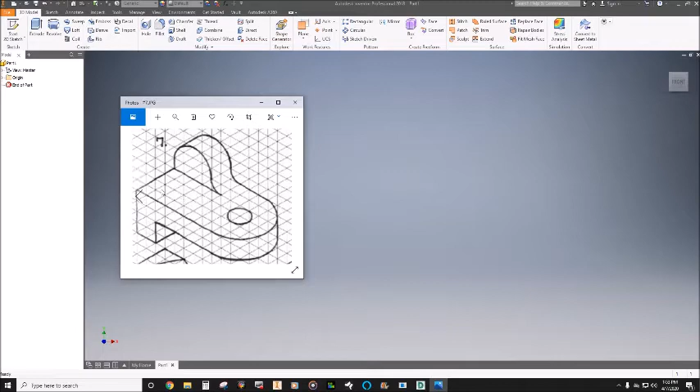All right, let's take a look at shape number 7 here. Remember that each one of these spaces is half an inch. So I'm going to draw some little marks here. 1, 2 inches, 3 inches, 4 inches, 5, so 5.5 inches is the width.

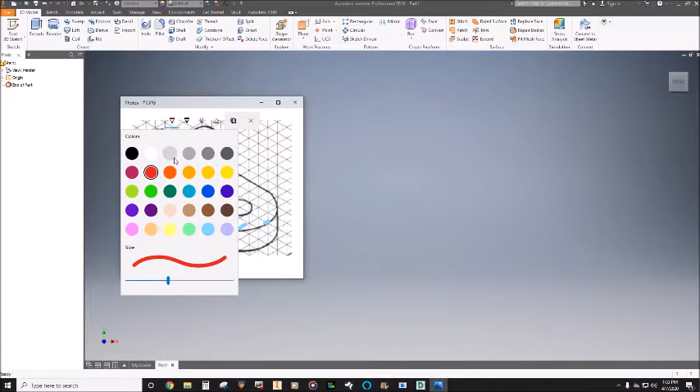Let's take a look at height. 1, 2, and then here we have 3.5. So that's the height, and then the depth obviously is 1, 2, 3. Okay, so I could put the third one back there. All right, so 1, 2, 3 is the depth. We've got 5.5 coming this way. 1, 2, 3, 4, 5.5, and essentially 3.5 high.

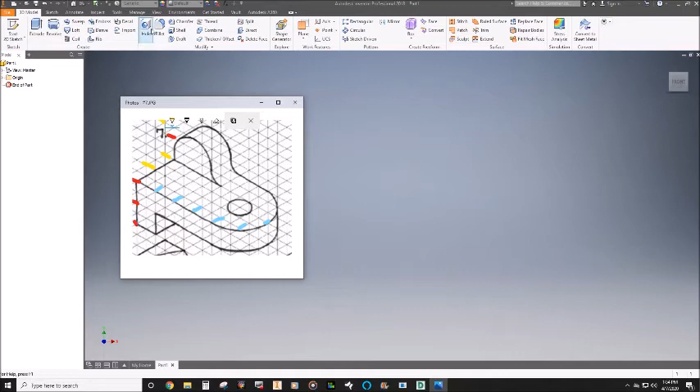All right, so I'm going to put this down here in the corner. We'll start drawing in our area here. Remember that it should be in your project, whatever project you name this, and if you need to revisit that, go back to last week's video and set up a project. But I'm still in the shapes, the one that I created last week, and I'm going to create this part.

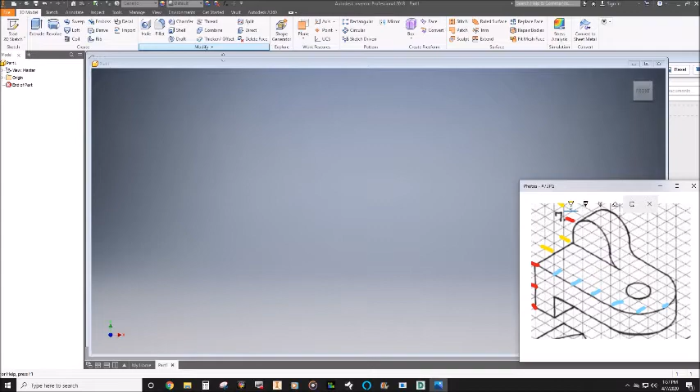It's here. So essentially I'm going to create this bottom L shape, okay, all the way out to 5.5. I'll worry about this trim here, and then I'm going to extrude it to depth. So let's try that first. Actually, let's do this. There we go.

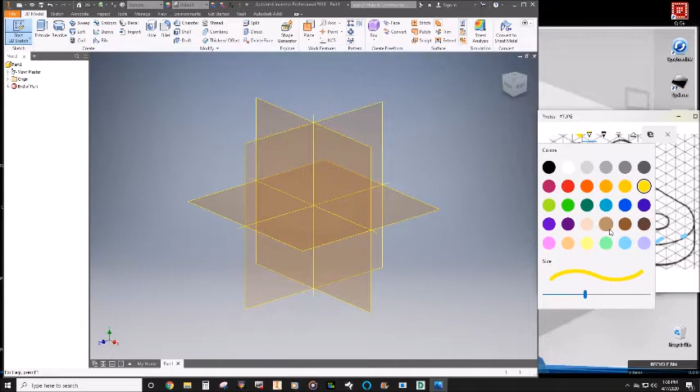So I'm going to start my sketch. I'm going to look at the front from this side here. So if we can imagine looking at it this way, this would be my top down here, my right side, my left side in the back. So I'm going to use that XY plane.

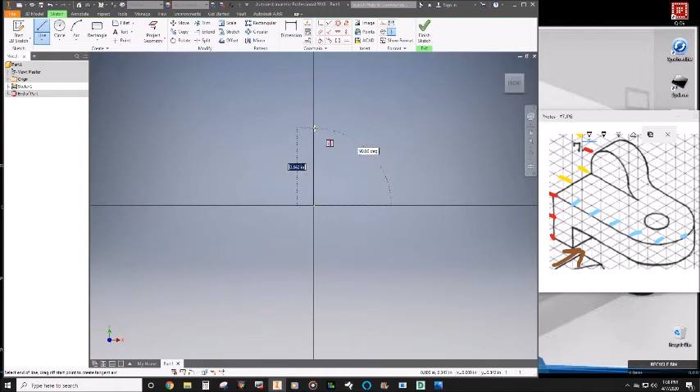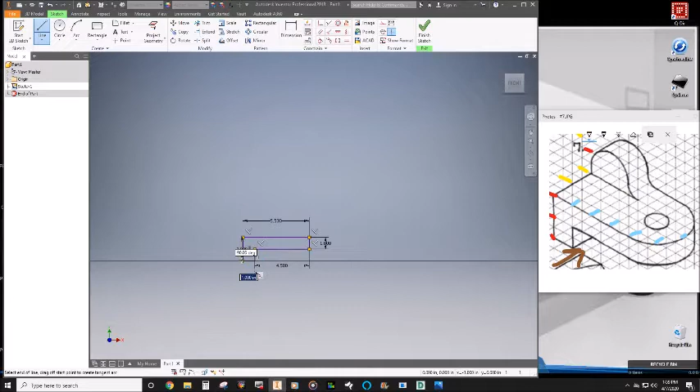And I'm just going to create line work. 2 up. Use my mouse wheel to scroll out. Go over to the right, 5.5, 5.5, right? Come down 1, go back 4.5, and come down 1. There's my L shape. Okay, if I look at this from the front view, it's this L shape here without the curve.

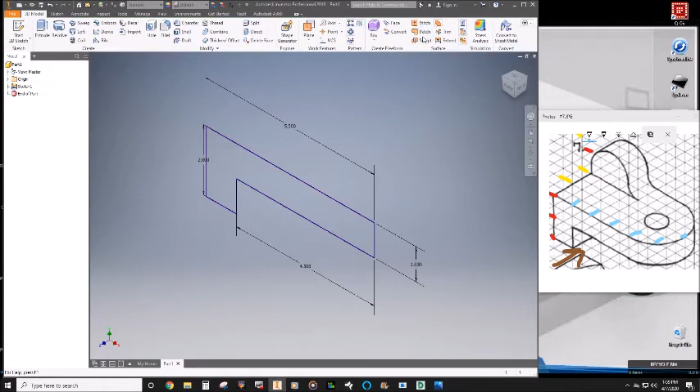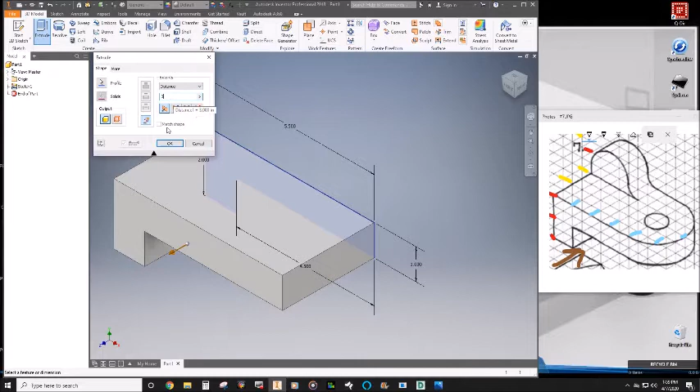So now I'm just going to extrude it 3 deep. Finish sketch up here. Finish sketch. Extrude 3. And remember, you can extrude it pulling it towards you, you can push it away, you can do it both ways, whatever floats your boat. 3, I change the dimension here. Hit OK. And that's my base.

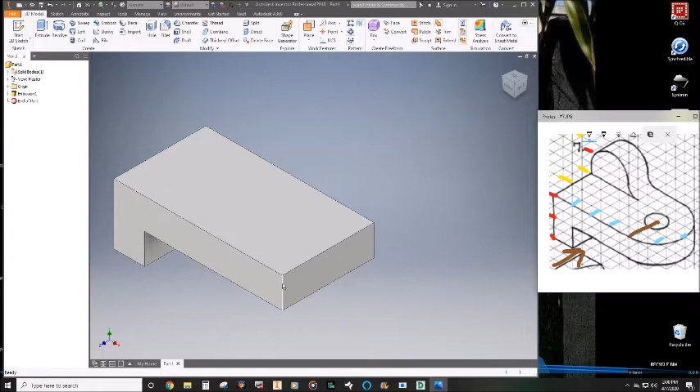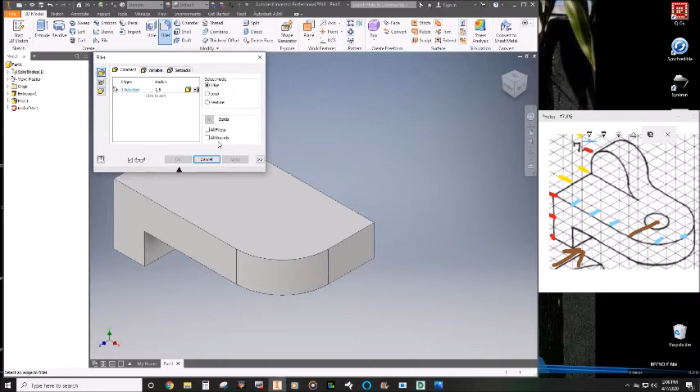Now I know that the center of this circle here to the outside is 1.5. So that's my radius, right? My radius is 1.5. I'm over here right now. On this brown line is the radius is 1.5. So I can say that I want this corner to be at a radius of 1.5, right? So I go up here to fillet, whatever you want to call it, fillet. Change my radius dimension to 1.5 and select that line. Hit apply. Same thing, radius 1.5. Select the line. Apply. And that gives you the radius.

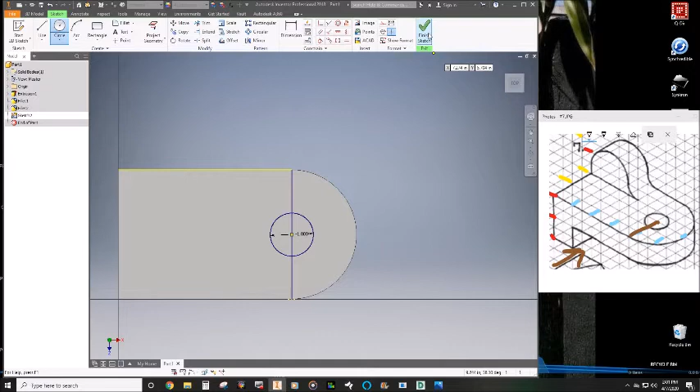For the hole here, we can simply sketch on this surface, right? We know that coming from the edge of this arc over here, that hole is centered. So the hole is 1 inch in diameter across. I'm just going to get the circle symbol, find the center point, and drag it till I can input 1 inch, right?

There you go. Finish the sketch. Extrude the hole. Oh, but I don't want a solid, I want to cut it. There you go. Distance really doesn't matter. You can extrude to the next surface, you can extrude all, however you want to do it. There's the shape in the hole.

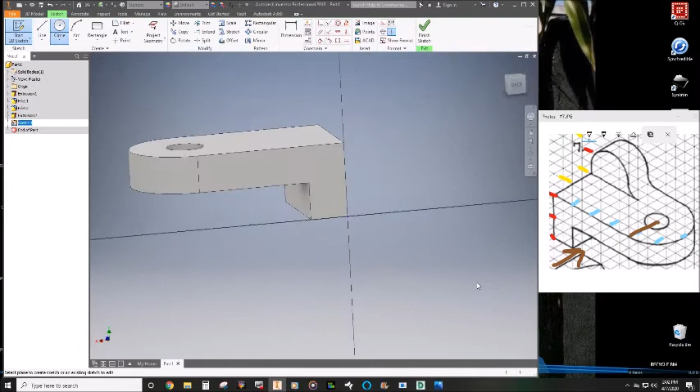And lastly, we're going to sketch on this surface to get this item here. So I've got to turn it around to the back. Here's my front view. The features on this back side flush with that back wall. So I'm going to spin the drawing around and sketch on this surface. Create sketch up here, touch the surface. And now my sketch is on that surface there, okay? So I'm going to sketch up here.

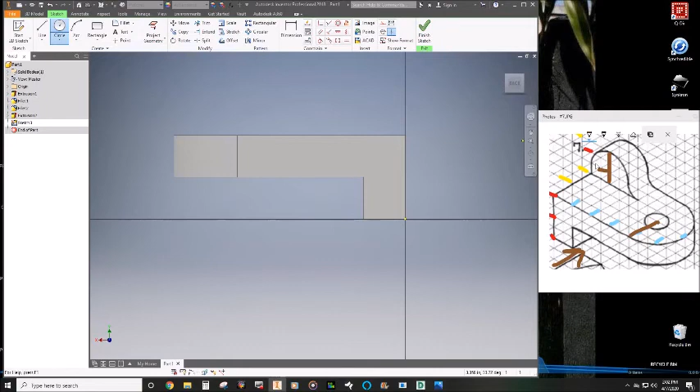We see here that this little circular feature is 1/2 an inch up, and the center of it is 1 inch in. So if I create a circle that is 2 inches in diameter, right? Because this is 2 inches all the way across. And then I put dimensions from the bottom to the center of the circle of what? 0.5, right? And then dimension from the back wall feature to the center of the circle is 1. That puts the circle where it needs to be.

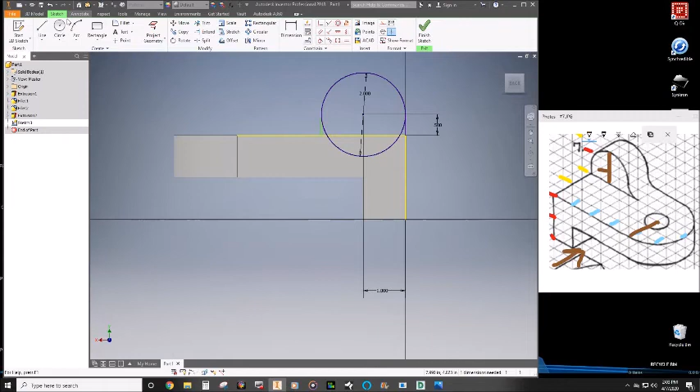Now we have to worry about these straight edges coming down. Okay, so we're going to just draw a line. And I'm going to hover over the edge of that circle, and it should snap right to the center or tangent line and just come straight down. Right? So same thing on the other side, straight down. I'm also going to put a line across the bottom here.

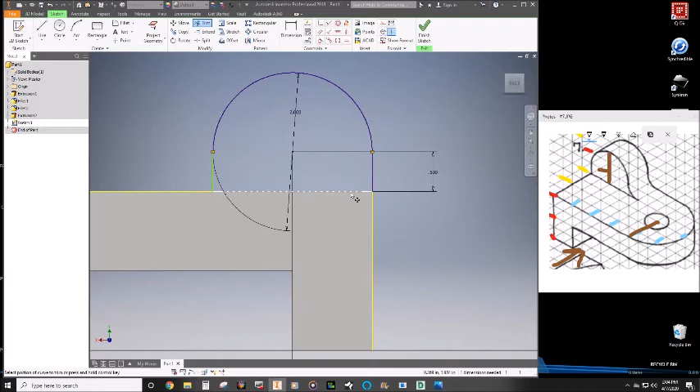Okay, now there's a lot of line work in there, and we don't need all of it. So we can use our trim tool. Trim the bottom away, trim that inside arc, trim that inside arc, and now we've got a semicircle sitting on top of 2 posts with a bottom. Finish our sketch. Extrude this. Going the other way, but we only want to go 1 inch.

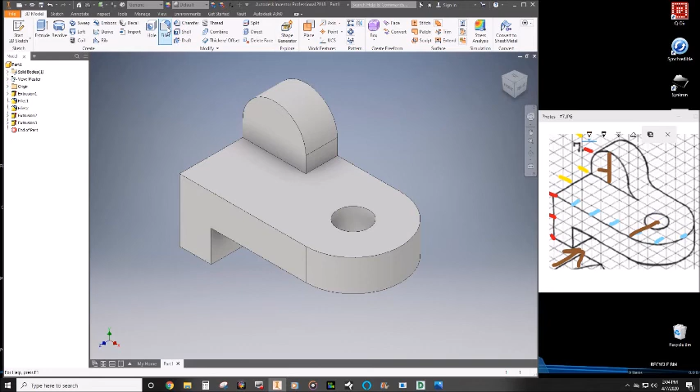Right? Okay, so we take a look at it, and the only other feature is this fillet here. And we know that it's a 1/2 inch fillet. So fillet, 0.5. This line here, not this line, not the top line, but the line that's in the very vertex. Apply. So you see the fillet tool does both an additive fillet and a subtractive fillet. Just depends on which, it's kind of intuitive in the drawing. So in this time we wanted to add it, we wanted to add it to those 2 surfaces. In this one here, we were cutting it away.

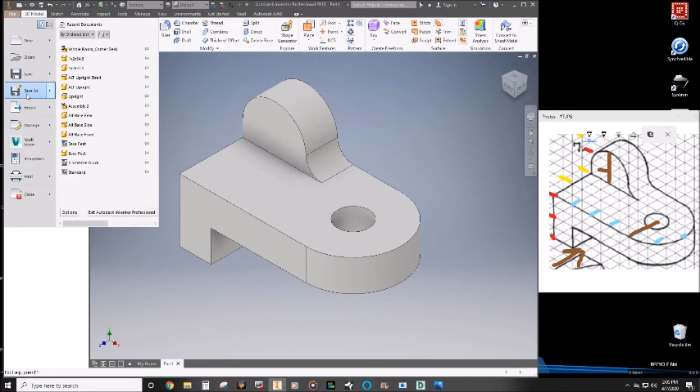So there's number 7. File, save as, number 7. Save. And there it is, number 7.

Okay, so that's that one. We'll move on to the next one.